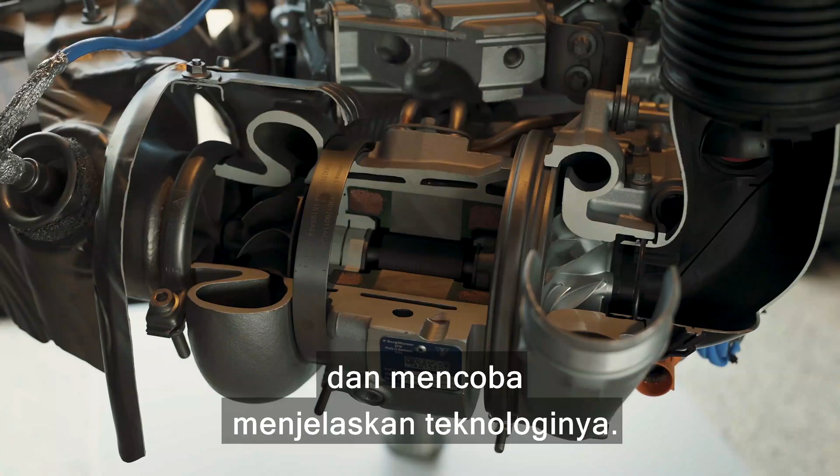Now in this video I'm going to tell you everything you need to know about this new 911. I'm going to talk you around the exterior, why now, and the interior. I'm going to try and explain its technology and how it all works with the help of some VR. I'm also going to compare the performance of the new GTS around a track compared to the old GTS with the help of a Porsche racing driver. That wasn't your finest work there, was it? And of course, I'm going to launch the new car to see how quick it is from 0 to 60 miles an hour. I'm Matt Watson, and you're watching Carwow.

Let's start this video by talking about the design of this facelifted Porsche 911, the 992.2 generation. Now, there's one big change. Can you tell what it is? I'm going to give you a clue. Wait there. So, can you tell what it is? Now, the indicators are integrated into the headlights, so that's allowed them to redesign the bumper.

Now on this GTS model, you get some more changes as well. You get these fins here at the front, which can open and close depending on whether the brakes or the engine need more cooling or not. I'm not a fan of these really. I prefer the look of the front of the old GTS, but you tell me what you think.

Moving down the side, we have new alloy wheel designs. On the Carrera, you get 19s at the front, 20s at the rear. Here on the GTS, you have 20s at the front and 21s at the rear, and the GTS gets center locking nuts like on the GT3 RS.

No major changes apart from the T-hybrid. It's a big thing, we'll get onto that in a moment. Then moving around the back, you have a new rear bumper design and a new rear diffuser. And on the GTS, loving this, centrally mounted exhaust pipes. They look cool, I much prefer those than the old, kind of wider exhaust pipes. They're like on a GT car, aren't they?

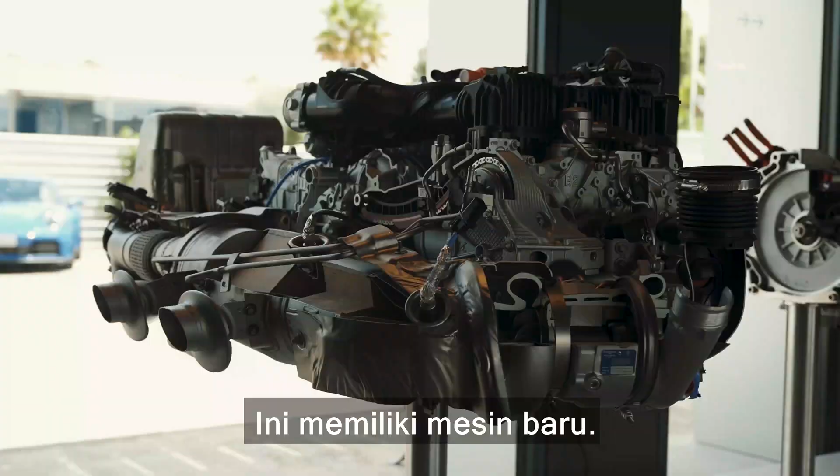What's really interesting though is this car. It's got a completely new engine, a 3.6 litre flat-six. It's got a wider bore and a longer stroke than the engine in the old GTS, and it's also just got one single turbocharger, but it's electrified.

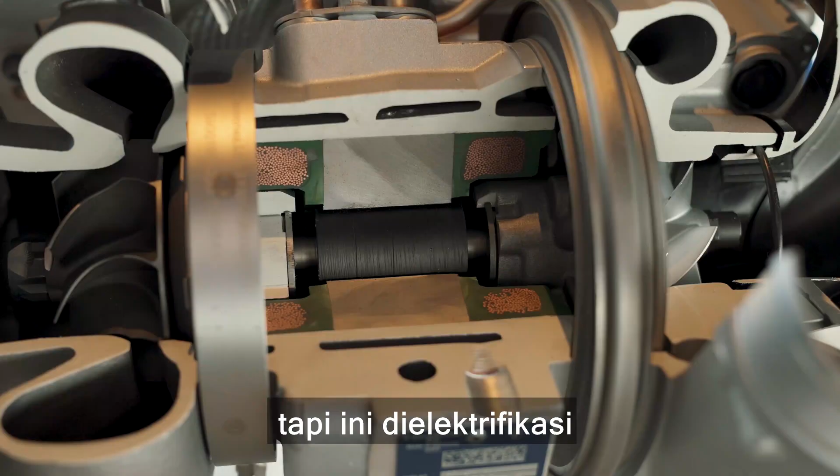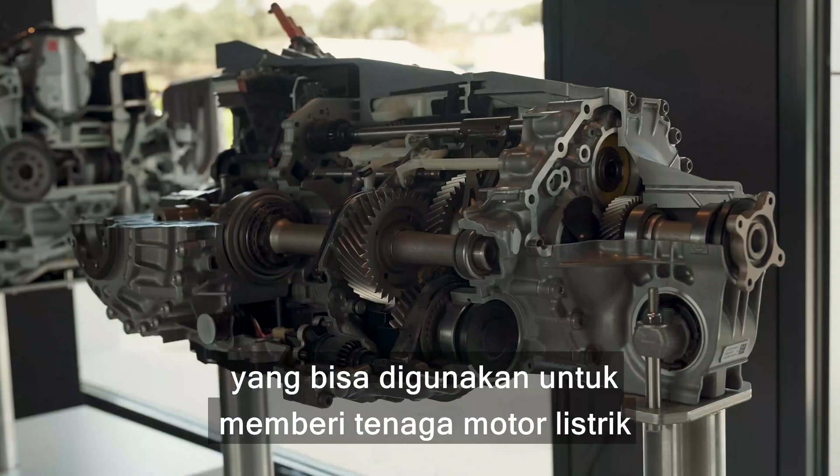What it can do is instantly spool up to reduce turbo lag, but it can also recoup energy and put it into a 400-volt fast discharge battery, which can then be used to power an e-motor that is in the 8-speed PDK dual clutch automatic gearbox.

The result is that this car has 541 horsepower, which is 61 horsepower more than the old 911 GTS, and it has 610 Newton meters of torque, which is 40 Newton meters more than the old car.

Problem is, all that kind of technology, the hybrid stuff, does add weight. So this car weighs in at 1,595 kilos for the rear-wheel drive version, which is 50 kilos heavier than the old GTS. When you go for the 4 GTS, you can add an extra 50 kilograms for that 4-wheel drive system. So what does all this mean in terms of performance?

Let's find out. Now let's see how quick this car is from 0 to 60 miles an hour. Porsche says this Carrera 4 GTS will take 3 seconds.

Let's see if it's a reality. I've got my specialist timing gear here. Track is a bit damp. Here we go, launch. Some wheel spin there. Porsche don't care.

2.96. But the question is, what is the difference between the two cars if you put some corners into the equation? So to compare the new GTS against the old one on track, I need the help of another racing driver.

Right, I'm in the car with Jörg Bergmeister. It's a little bit damp, but you've got the skills, right? I hope so. It sounds quick, doesn't it, his name? Jörg Bergmeister. But what does it mean when you translate it in German? Mountain master. Mountain master. I mean, you had to be a racing driver, didn't you?

We're going to do a launch start and we'll see what the difference is.

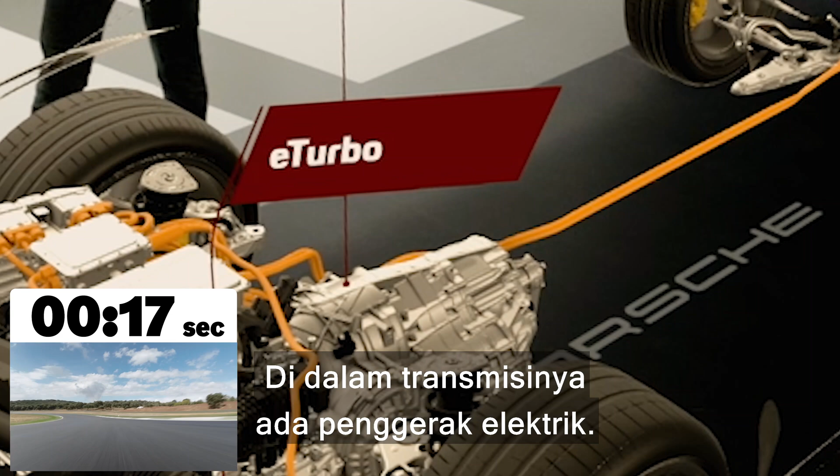Into the gearbox is the electrical machine, and here you see all the electrical control units, components, and DC-DC converter. Then you have the engine - a complete new development engine, 3.6 liter, 6-cylinder boxer.

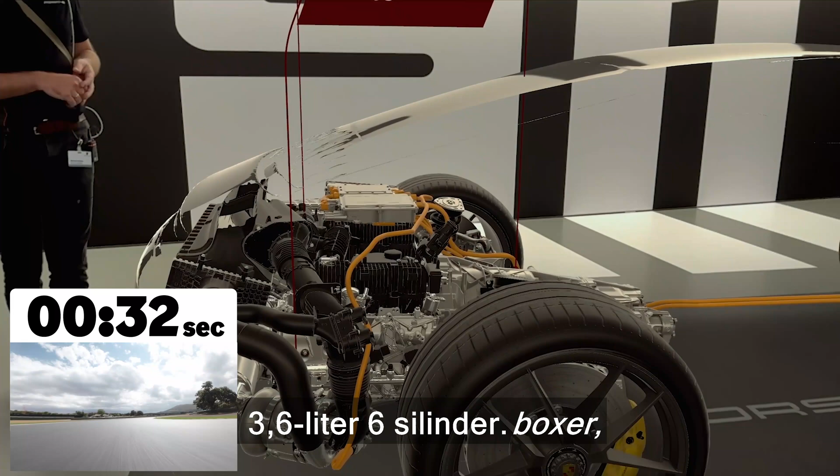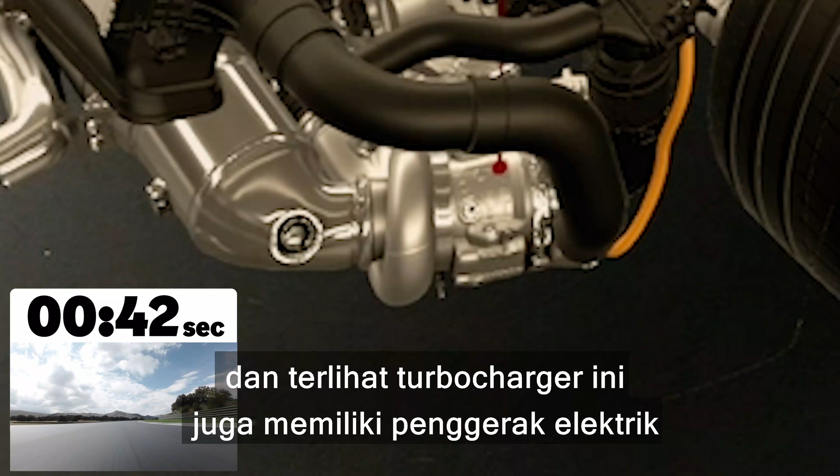And on the right side, you see a single turbocharger, and this is our hero. It's the name giver of the T-hybrid. And you see this turbocharger has also an electrical machine between the compressor and the turbine.

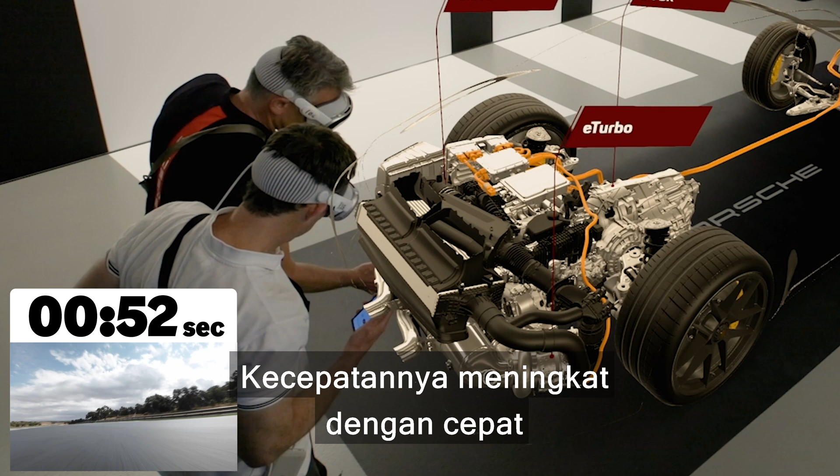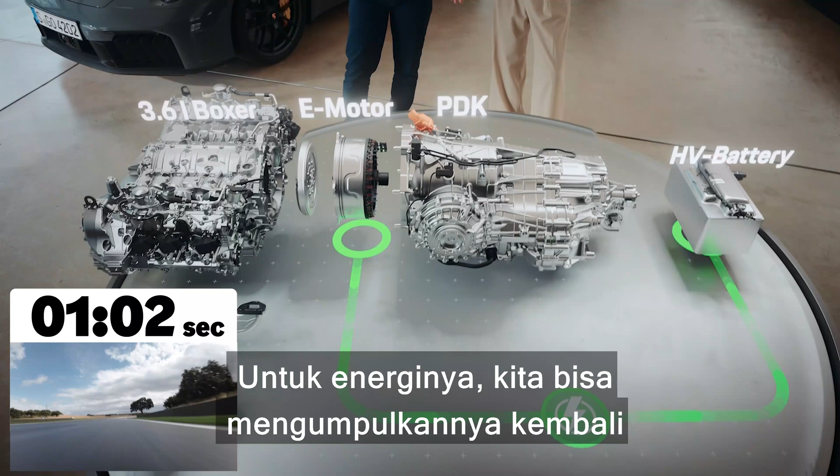With this machine, we can boost it with 20 kilowatt, so the speed rises up very, very fast. At the same time, we can brake the shaft, and with this braking energy, we can recuperate to refill the battery or put all the power into our electrical machine, so we get much more power for the whole car.

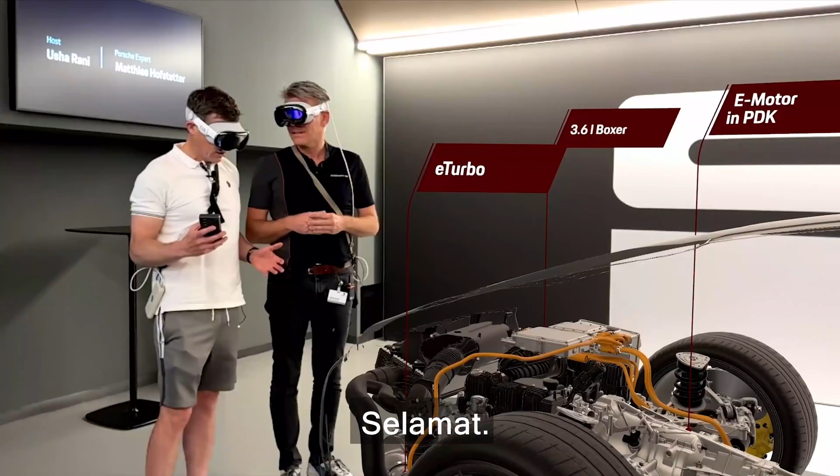Do you know what? You did it quicker than Jörg did a lap time, so well done. Basically, it somehow makes the car more efficient and yet more powerful.

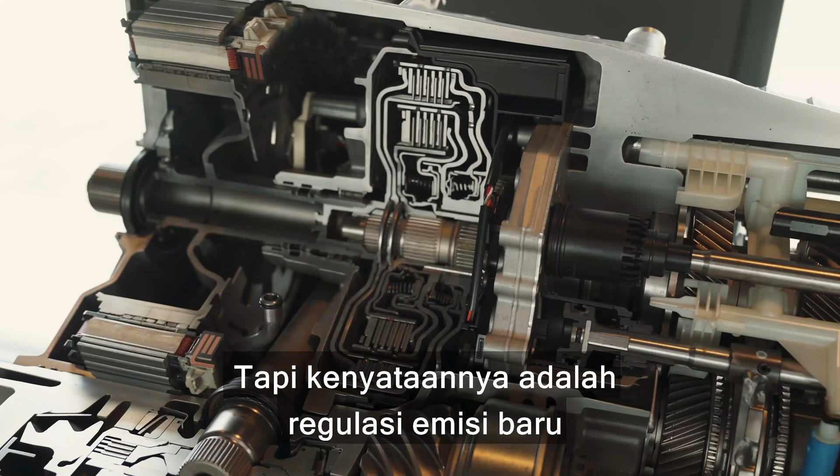As you can see, Porsche is very keen to talk about how the hybrid system is all about performance. But the reality is, new emissions regulations mean that they can no longer cool the catalytic converters by running the engine rich. So now they use the electric turbo to slow down the hot exhaust gases and recoup this energy as electricity and use it for more performance.

It's clever. However, what's clever, and has always been clever about the 911, is that it's always been the practical sports car. Here in the front you have decent door bins for a sports car. Look, you can even squeeze a large bottle in there like that.

Cup holder here on the center console. There is another one, look, if you go all the way over there for the passenger. The glove box is a reasonable size - that one's full of stuff. There's not much space under the armrest - that's where you keep your mobile phone. More on that in a bit.

But the great thing about the 911 has always been the fact that it has some occasional rear seats. As standard, the car comes just as a two-seater. You have to select that you want the rear seats. It's a no-cost option, but there is a chance you might forget to do that, and then you might regret it. Actually, I'm regretting this - I think this is smaller in the back than my old 996.

You can fit children back here, and there's ISOFIX just there - can you see that? ISOFIX anchor points. You're not going to be able to fit a bulky rear-facing seat here in the back, just booster seats. Here in the front though, look, there is ISOFIX on the front passenger seat there.

Can I even travel in the back of this car? Can you get in the front and see if I just got the seat? Oh, there we go. See if you could sit and drive now.

Yeah, I guess it's fine. I'm not so sure that I'm fine. I'm having to go side saddle and it's not good. I mean, what am I supposed to do with my legs? Believe it or not, I think I'd be happier travelling in the front boot of this car because it really is quite useful, this frunk on the 911.

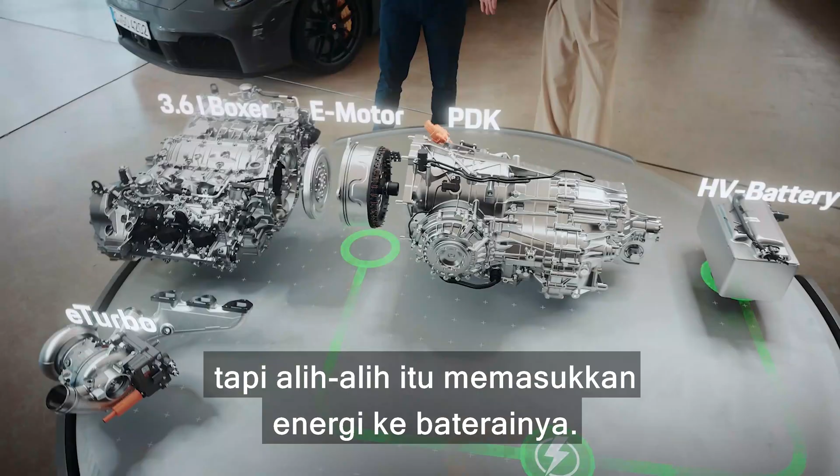Now, it appears that it only happens when the car is sort of coasting and you apply a bit of throttle, and the throttle isn't being used to actually power the car forward because it doesn't need it, but instead it's putting energy into the battery. When that line goes green and I'm actually accelerating, can hear it. There, yeah, you can. So odd. Doesn't matter probably for most Porsche buyers because you're going to be like over 40 anyway and you won't be able to hear it, but younger people can.

It's not all negative though. Here's 5 good things about this car.

There's a new axle lift system available as a £2,000 option. It's not fitted to my car, but this Cabriolet has it, and you can raise and lower the nose much quicker than the axle lift system you got on the old 911. Watch this. Up, down.

So these little vents here, those are special cooling vents for your mobile phone. So when you're wirelessly charging it and it gets a little bit hot, it'll actually blow cold air over the back of your phone so it doesn't overheat.

Now if you spec the carbon ceramic brakes on the GTS, you get the ones from the Turbo S, which means 1, 2, 3, 4, 5, then 5 on the other side, 10 piston calipers at the front, gripping a 420mm disc, and then 4 piston calipers at the back with a 410mm disc.

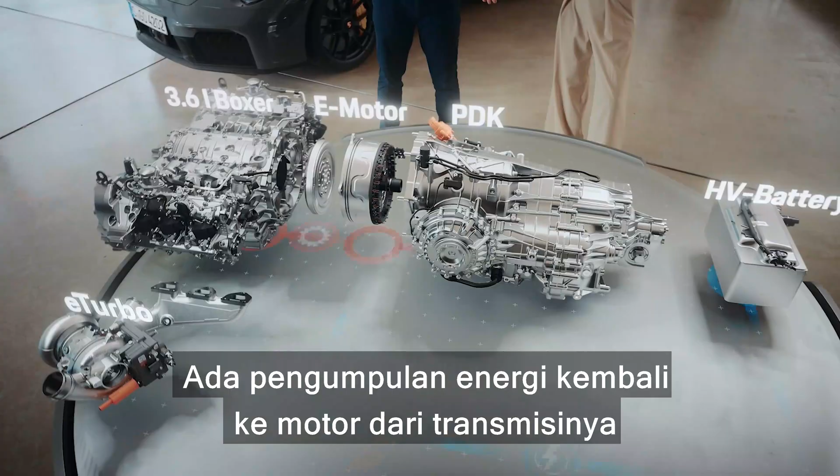Also, what's really good about the GTS, regardless of whether you go for the carbon ceramics, which by the way cost £9,000, is that there's no brake blending. So you don't have any regen braking at all on the brake pedal. You do have some recuperation to the motor in the gearbox when you lift off the throttle, but the advantage of not having it through the brake pedal means that the brakes feel perfectly natural, like you want from a 911.

Adaptive dampers are standard, and the GTS sits 10mm lower to the ground than the standard Carrera with stiffer springs and retuned dampers and anti-roll bars. Plus, it gets Porsche torque vectoring, so a continuously variable limited slip differential on the rear axle, plus rear axle steering, so it'll turn the rear wheels in the same direction as the front at high speeds to make the car feel more agile and stable, but it also turns them in the opposite direction at low speeds to make the car more maneuverable.

Now you're going to be able to order the new GTS with Porsche's dynamic chassis control, which is basically active anti-roll bars that can alter the stiffness mid-corner to improve the handling and keep the car nice and flat through the bends. It uses the high voltage battery from the hybrid system to power the anti-roll bars so they can respond like that.

You can get new HD matrix headlamps as an option, and they have 32,000 individual pixels, so they can blank out their beam really accurately so you don't dazzle oncoming drivers, and they can even project the actual outline of the car on the road ahead so you know whether you're going to fit through a gap. The best bit is they can illuminate the road up to 600 meters ahead of you. I want them.

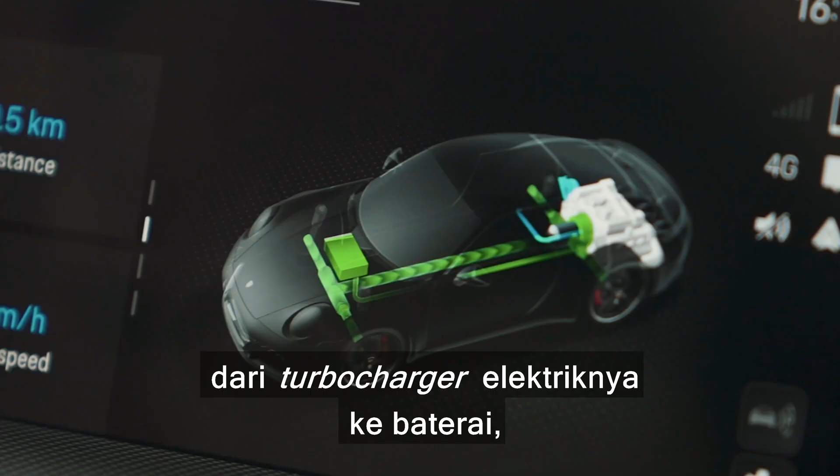Oh, by the way, look here, you can see the power distribution from the electric turbocharger to the battery, from the electric turbocharger into the motor, and so on. Let's see what all of that stuff does for the economy.

Well, I'm just cruising about. This is a good opportunity to evaluate the car's comfort levels.

So there is a bit of wind noise coming from this pillar and the door mirror. The tyre noise isn't as bad as I remember. I don't know whether it's new tyres or maybe it's just that I'm used to my GT3 RS, which has far less soundproofing and is quite noisy. One of the great things about the Porsche 911 has always been its everyday usability.

Despite all the upgrades, those adaptive dampers do a great job of not only keeping the car feeling nice and sporty and flat in the bends, but dealing with bumps. I mean, it's not like a luxury limousine the way it goes over bumps, but it's still pretty impressive. Look, these are the most awful and abrupt speed humps, and not too much of an issue.

It's reasonably manoeuvrable. Why do I feel like I've gone the wrong way? Let's just keep going. Right. Definitely need to turn around. Can we make it round? We've got rear axle steering as standard on this car. Oh no, I've got myself into a right pickle.

Thankfully, we get a reversing camera as standard. Believe it or not, on my 911 GT3 RS, I had to pay extra for a blooming reversing camera. Thankfully, the steering isn't overly heavy, and we've got front cameras. This is what I don't have on my car. It doesn't have the all-round view cameras. You can't even get it.

I really wish it had them, because the dash is quite high in this 992 generation of 911, so you don't get quite the sense of where the very end of the car is like you do in the older 911s. Well, you don't if you want to sit nice and low. You can jack your seat up, then you can see, but who wants to drive a 911 like that? You need to be slammed with your ass on the deck, don't you?